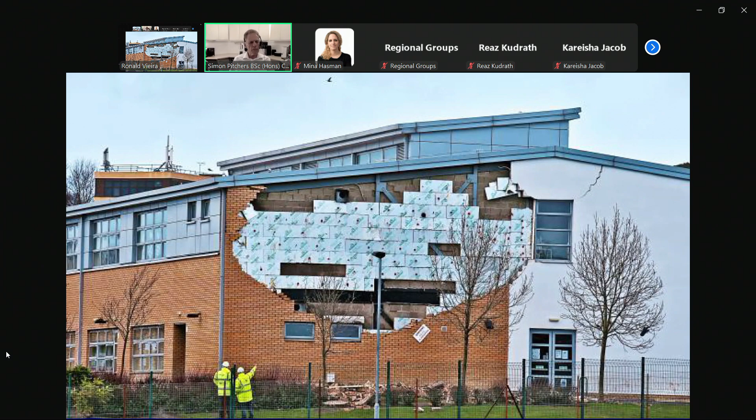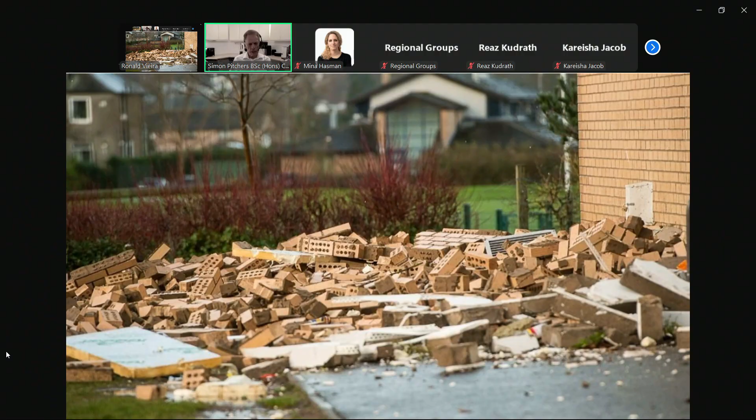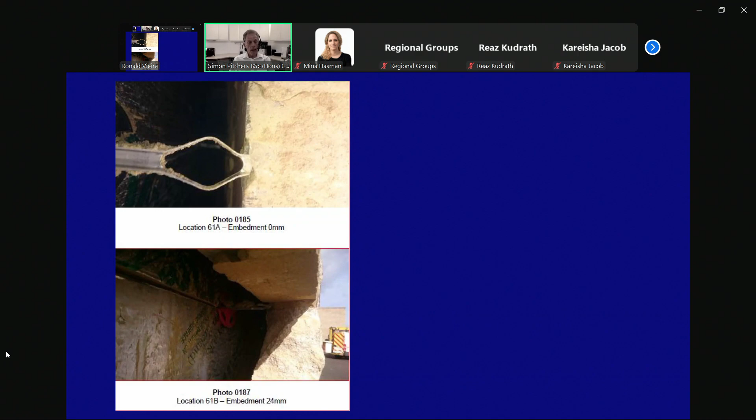You see the photo underneath, there's another wall tie which has got about 24 millimetres of embedment. Here's a view down the cavity, a very wide cavity, and you can see the problem was absolutely widespread - there were virtually no wall ties bonding the two leaves together. It went further than that, because at the top of the wall, the designer had quite properly designed a proper restraint system which would be bolted to the steelwork, extend down the cavity, and then you had a stainless steel cutlery set effectively, which would hold the two leaves to the vertical pieces extending down the cavity. They found those components resting on the top of the wall when they did their investigation. Now, what's really astonishing is, this is 2017, every tick sheet you can imagine had been ticked by every QA specialist that ever lived. It was absolutely ticked to pieces, and it didn't make the slightest jot of difference. That's one of the learning points from all this - you just can't rely on tick sheets.

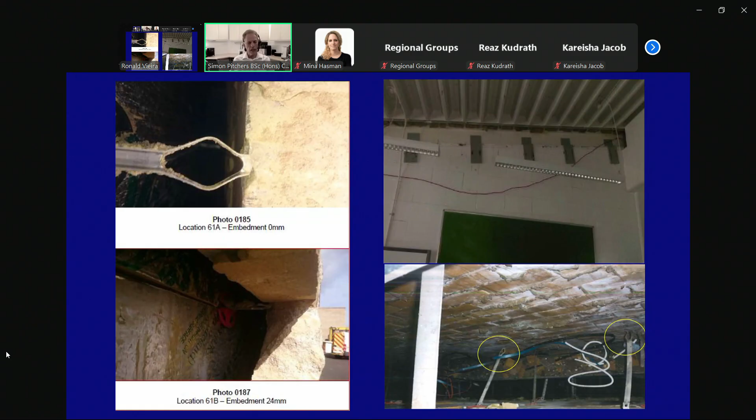Then we move on to the terrible Grenfell disaster. Now, the most recent report doesn't say the principal cause was bad construction, but there was poor construction involved as well. The main cause of the problem was the use of incorrect material on the outside skin, and also incorrect insulation, which was inflammable. But the regulator in the UK has got a lot to do - they've got to manage and update their system, check designs comply with the regulations, do auditing of their inspectors, and carry out stage inspections of construction. People think incorrectly that that's enough, but it isn't.

I've worked on site loads, and I'm sure lots of people here have as well. What you do when you know the building control person's coming round, you cover everything up and point them in a different direction so they don't see what's wrong. I'm afraid that's what it's like in the construction industry. So what you really need is comprehensive scrutiny of construction, and nobody does that, and it's getting worse. That's the big problem.

Now you look at this - this is CROSS. This is a report they produced on why things fail or go wrong during the construction phase.

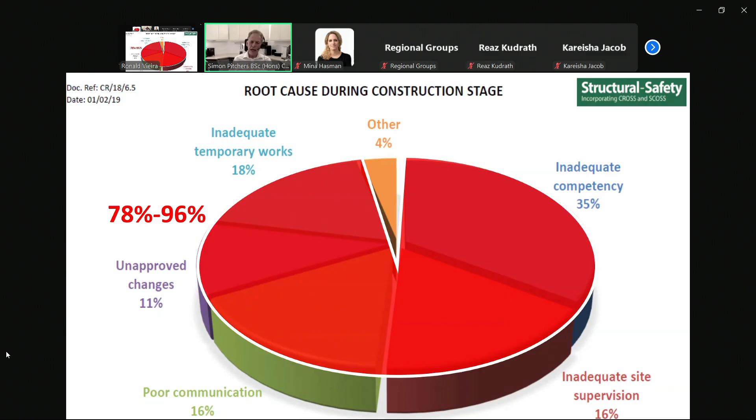If you look at that as a whole, it would appear that somewhere between about 80 and 96% of the time, if there had been scrutiny on site, those things wouldn't have gone wrong. So I think scrutiny is a really important thing that's completely overlooked, and it's something we all need to make an effort to get right.

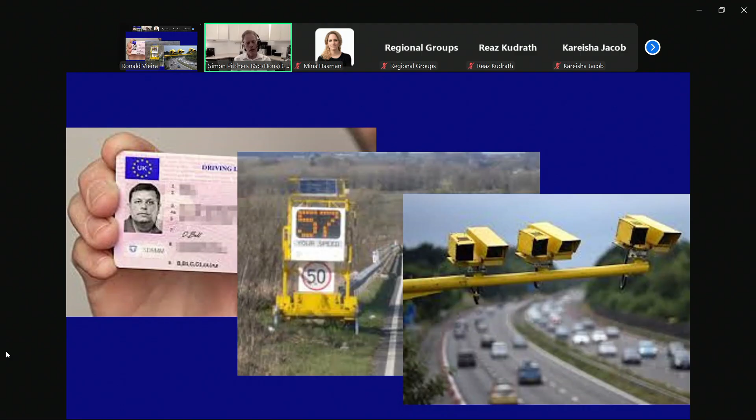People say it's competence, but I've got a license that proves I'm competent to drive. But I'll tell you what, when it comes to observing the rules, I'm much more likely to do so if I'm under scrutiny.

So the ideal scenario would be to have everything in every building scrutinised while it was built. But you then come up against this problem called proportionality. There's only so many people out there who are able to do the scrutiny, and there's not enough resource to scrutinise all buildings being constructed. So we've got to find a better way.

And that's where this guide comes in. Now get ready with your camera phones, because there's a QR code you can photograph in a minute, and you'll get this document for free. It's like the notes to this lecture, really.

It's called A Guide to Managing Safety-Critical Elements in Building Construction. Not a very catchy title, I appreciate that, but it does bring about some quite useful stuff that I think you'll benefit from, no matter which country you're operating in or how you actually operate.

So the ideal scenario - I'm going to leave this, but don't worry, we'll get it again at the end - is that we actually look at every single thing that's being built, but we can't do that. There's just too much to look at.

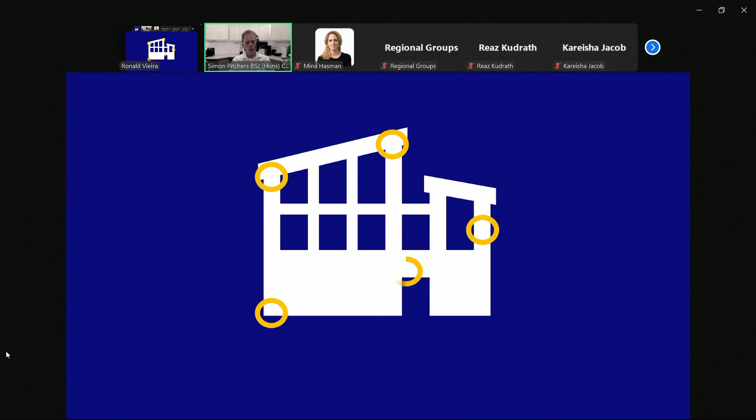So what the guide does is it shows you how you can identify safety critical elements, and then it explains how to deal with them, so we're only focusing on the elements of key importance, reducing the inspections and the amount of evidence needed.

Now you'll be pleased to know that you can read the whole of my document in 12 minutes. That's from the end of the contents page to the beginning of the appendices - a 12-minute read. So there's no reason why you can't download it and read it at tea break time or when you're going home tonight.

I reckon, and I know this is an outrageous claim to make, but I think this is a silver bullet. I think if it was implemented on all projects, we would just transform the industry. Carbon saving as well - that's something else I'll come to at the end, which would come out of this. I really do think this could solve so many problems.

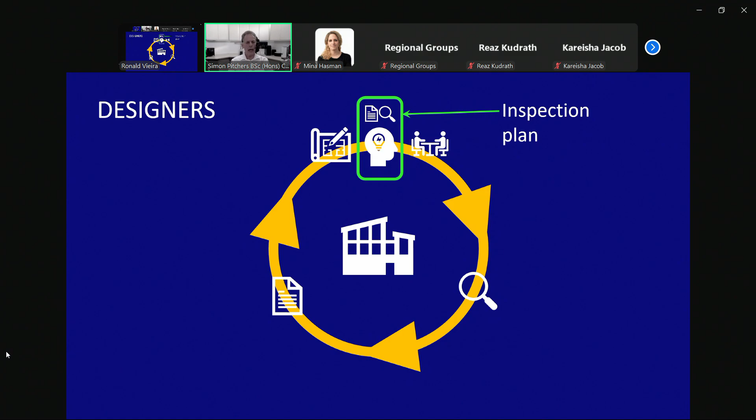And that is called an inspection plan. So you have an inspection plan before you start. You might already do this, I don't know, but we certainly don't do it properly in the UK yet, though we're gradually dragging ourselves in the right direction.

Now, what about quantity surveyors? Well, quantity surveyors need to broaden their horizons. They don't want to just be all about value engineering and cutting costs and cutting capital. It just drives me mad.

I was out the other day in Weston-super-Mare, wandering around a block of flats, and I remember thinking, I told them to hot dip galvanise those balustrades. And they didn't. The quantity surveyor said, no, too expensive, Simon. We want to save ourselves £1,000 and we're going to paint them.

And now they've got a sort of seven-storey building and it's going rusty because it's by the seaside. And it's going to cost a fortune.

Such false economy. So instead of driving costs down, quantity surveyors need to keep an eye on costs, but they need to look further than capital costs. They've got to start believing in the value of proper inspection and collection of evidence to prove compliance. They need to appreciate how this can save vast sums of money.

I mean, you look at the money that's being expended in London at the moment on things that have gone wrong. Whole buildings are being demolished and rebuilt as a result of this. Think of the carbon footprint of that. It's mad. All we've got to do is make sure we're doing it right the first time.

And what they need to do is make sure the inspections are being done, and they need to check up on the inspections and check people are collecting the right evidence as well. So it's maintaining this involvement and valuing checking.

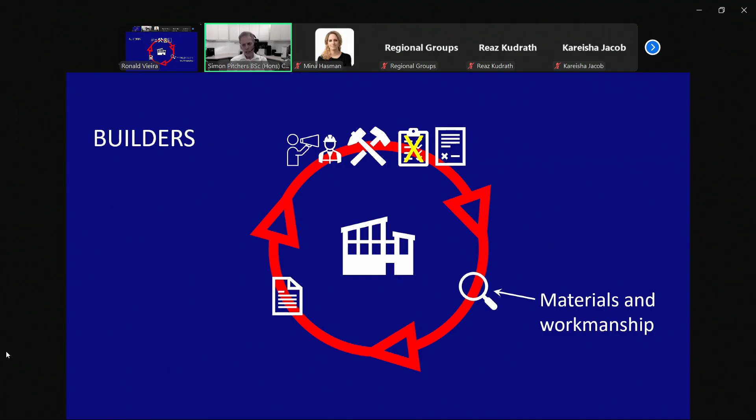So that's how we've all got to change. That's how all the disciplines have to change. What about the process? Well, the process really needs clarifying, needs simplifying, needs refining, and it needs streamlining. We've just got to get smarter with this.

So here are some examples. Really, you shouldn't be allowed to start work until the design is complete. Only then should you be allowed to start. I know this sounds basic, but honestly it happens all the time where you'll have builders starting work on site and they've not got proper information to build from. And then we complain that our work isn't built correctly, and that's the reason why.

It's not their fault - if you don't have proper information and you've got a program to meet, you just crack on, don't you? Another thing: changes. If the design is changed, you've got to stop and not do anything, because you need to consult the stakeholders in the design - building control, the client, other members of the professional team. When they say, yeah, we're happy, that's when the change can be implemented.

Now, change, as everybody probably knows, is the mother of disaster. So you've got to control change. Change inevitably happens - we've just got to keep a lid on it and make sure everybody's happy before it's implemented.

Having to go through this process will slow things down, but it'll make us a lot better at getting it right first time. Now, when people arrive on site, before they're deployed, you've got to check their credentials. The principal contractor needs to get evidence from each person operating on their site to show they're competent to do the tasks before they're let loose on site. They also need to make sure these people know what evidence will be required of them before they start working. So in a nutshell, everybody in the team needs to take a bit more responsibility. That's really what this whole guide is about. Now let's get into the nitty gritty, shall we?

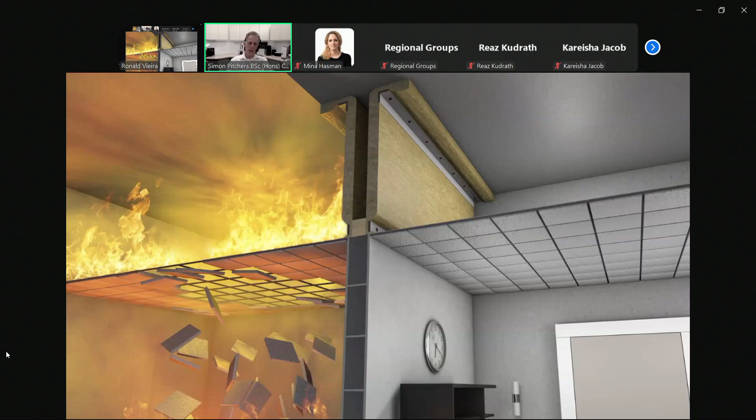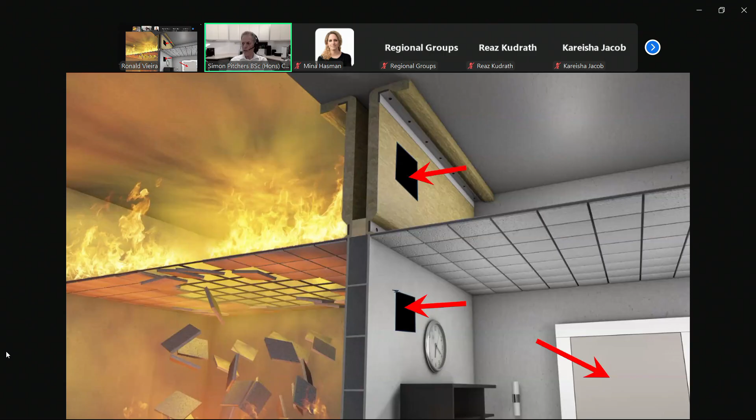The next category is anything that might impede escape in the event of fire - for example, that ceiling that just fell down would be a safety critical element. Here's more examples: a hole through that wall would be a safety critical element because it could allow fire to spread through a fire compartment, or through that fire door - that could be a real problem as well. So there's a lot of fire safety related items that could be an issue.

The next category of safety critical elements are things that stop people or objects falling off or out of buildings. So those fixings on that balcony would be safety critical. Those fixings holding that suspended ceiling in place would be safety critical. Those wall support units attached to the outer leaf would be safety critical as well, and those mount systems holding onto those PV panels. I had a PV panel blow off the roof of a supermarket and it went through the back window of a Range Rover with a child in the back seat. Luckily nobody was hurt, but it shows how dangerous these things can be - one loose screw and you're really in trouble.

Wall ties - sorry to keep harping on about wall ties, but they're just such an easy target - and the things that restrain stone as well. So those are things that stop things or people falling off buildings.

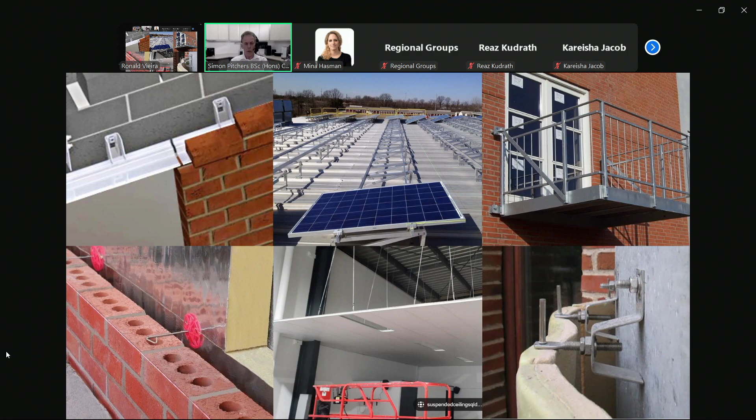Let's move on to the next category - this is collapse, things that prevent collapse. So things like precast units and their connections, steel beams and their connections, big retaining walls - making sure those are built correctly. They are safety critical elements. If they go, you could have a real disaster on your hands. Post-tension slabs, that's another one. Masonry reinforcement in walls - if you forget to put that in and the wind blows in the wrong direction, you could be in big trouble.

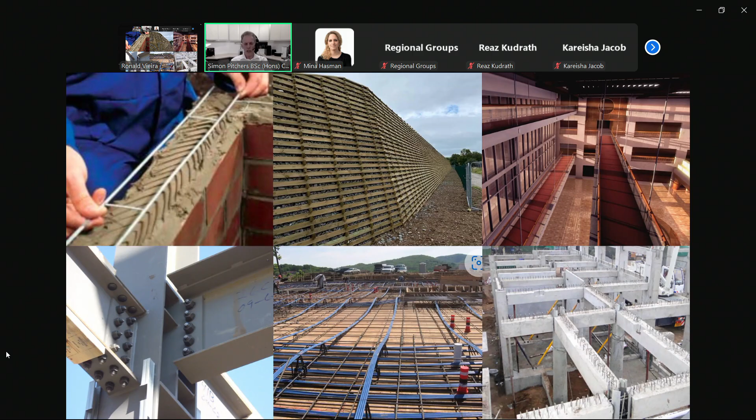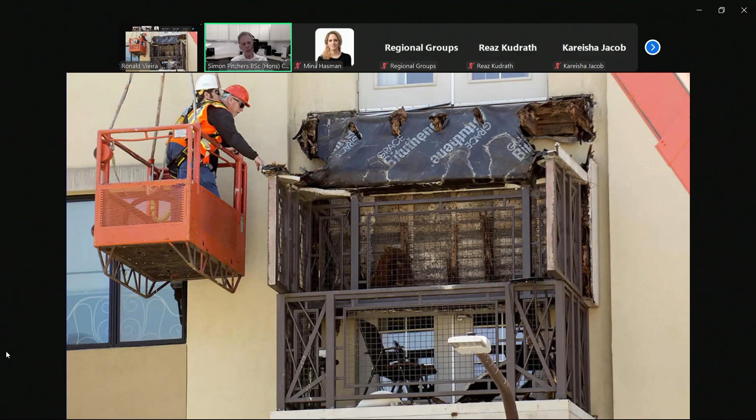And that sadly is the Berkeley, California 2015 balcony collapse. You can see the balcony above has fallen onto the balcony below, and you see those stumps sticking out of the wall - those were decayed timber joists, which were cantilevering from the face of the building. Those were obviously safety critical elements.

Another category is things that provide protection from, or could detrimentally interface with, hidden hazards. For example, if you've got a tunnel and you're driving piles near it, that pile would be a safety critical element because it could possibly go through the tunnel, so that would require extra special scrutiny. Another example is gas-proof membranes - somebody described a gas-proof membrane to me as flat roofing on the ground.

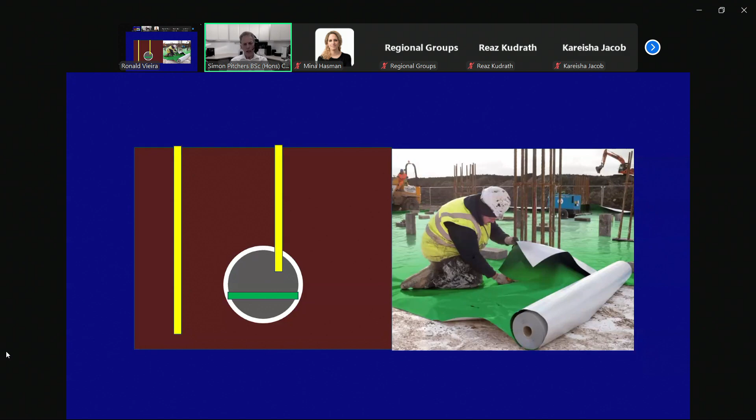And you've got to be so careful that there isn't a gap in it. Otherwise, the whole system could fail. So again, gas-proof membranes - those are safety critical elements.

So there you go. I think you've got a flavour now of how you would identify a safety critical element. And the guide that you will get - you get it for free by clicking on that QR code that I sent you - explains it in more detail. So let's move on now.

Let's look at scrutineers. So who can be scrutineers? Scrutineers who are going to look at that safety critical element. Now, don't forget, safety critical elements require independent inspection. But what do we mean by independent?

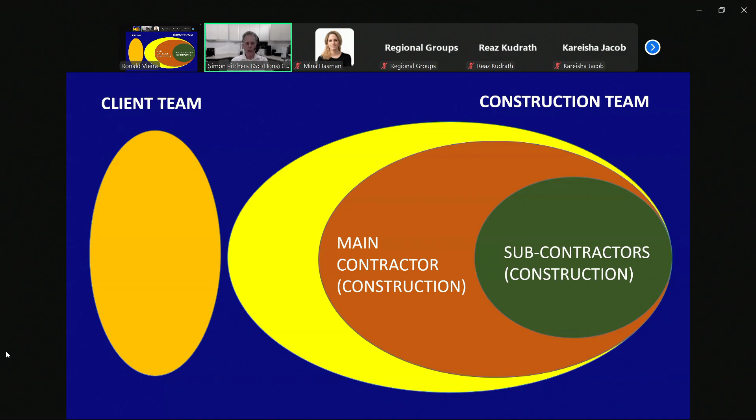How independent is independent? What you wouldn't want is for a scrutineer to be directly involved in the construction of the building. Otherwise it's like they're marking their own homework. So you wouldn't want a scrutineer to be from the main contractor or from the subcontractor's construction arm.

However, a scrutineer could be a third-party certifier. Now, quite often with gas-proof membranes, you have third-party certifiers who come to site, they review on behalf of the manufacturer that the thing's been installed, and then they give you a certificate at the end.

That's a good solution. Clerks of works - but I don't know what it's like where you're from, but in the UK, clerks of works are incredibly rare. The numbers of clerks of works have virtually quartered, I would say, in the last 10 years. It's very, very difficult to get clerks of works. So who is there left who can do this scrutiny?

Well, designers - that's where we need to step in. Designers could do this, and in fact, we are the best people. Designers are the best people to scrutinize their own designs. You understand the risks better than anybody. So who better than designers?

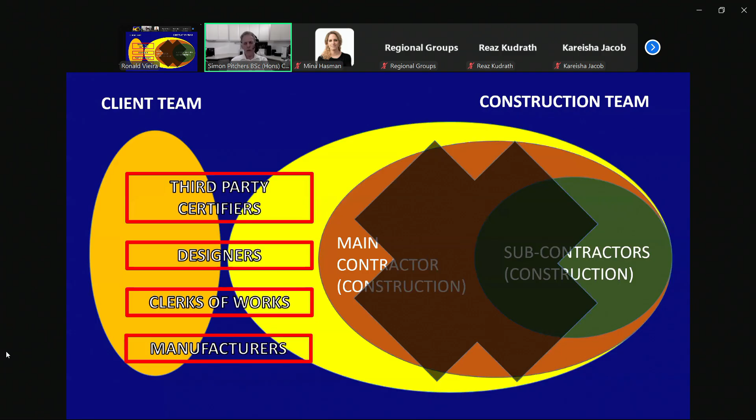But you'd need to get paid for it - you couldn't do it for nothing. And you wouldn't want massive liability in so doing as well. But we thought through that as well. And also manufacturers - manufacturers don't want their products installed wrong, so they are good people to come out and scrutinize. So that's where you can get your scrutineers from.

Okay, evidence - let's just talk about evidence. How do you specify the collection and retention of evidence? So first of all, how do you actually specify an element?

Now this is really, really critical if you're doing scrutiny. First of all, you've got to be absolutely clear about what scrutiny you're doing. You can't just give some kind of generalized comment saying, I'm going to visit the site so many times a month and look at the safety critical element. It just won't work, okay?

What you have to do is be hyper analytical on where the elements are. So you might issue a plan - let's go back to wall ties - and you might say, I'm going to look at the wall ties that are involved in the construction of that plan. But that's not good enough, okay?

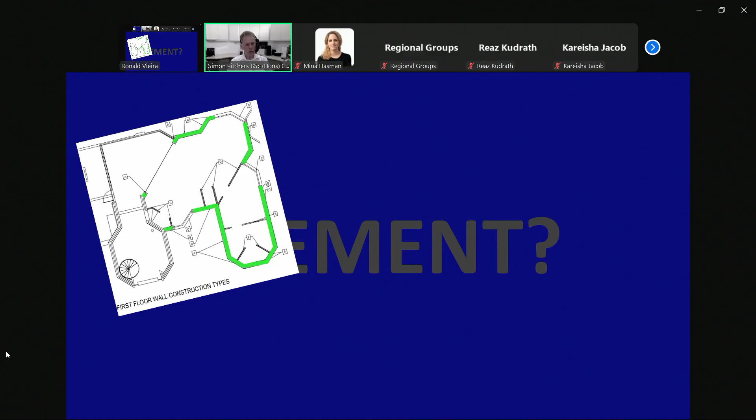What you need to do is mark up which bits of the plan had the wall ties that you thought were safety critical and needed scrutiny. But that's not enough, because you need to show them on elevation as well, because it might mean that you're doing all of the wall ties from ground floor up to roof, or maybe just from first floor. Who knows? So you need to shade that in on an elevation or find some other way of being very specific - you're saying where the location of the element is.

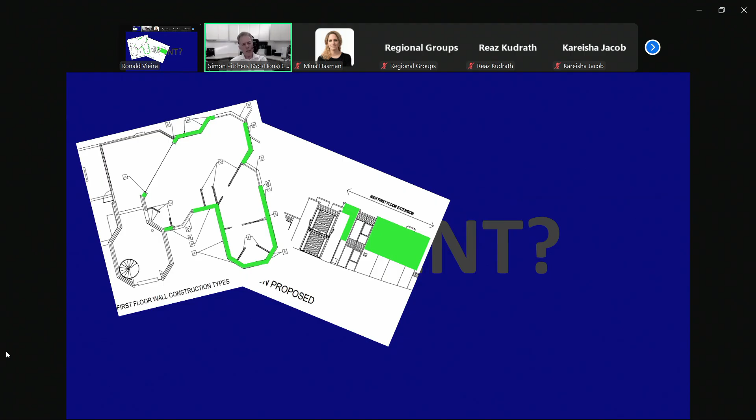You're being very specific in that regard, but you also need to say what you're checking against. So you need the specification, and you need to highlight which bits of the specification you're going to check.

Now, if you do those things, the scrutiny that you're going to provide to the project is absolutely nailed down. Nobody can say, well, you were on site and you should have seen that. No, I went on site and I was just looking at these things. That was my specific job, and that's what I've done, with reasonable skill and care. So I didn't look at anything else. That is all I have been contracted to look at.

That then gets away from the age-old problem of why designers are quite often, quite rightly, concerned about stepping on site, because they may get landed with all sorts of stuff.

And it's not just your inspections that you need to rely on when you're thinking about whether something's good enough or not. You may also depend upon other scrutineers providing you with their evidence, and you can take that into consideration. It might be the builders saying, here's a load of reports we've done showing these wall ties, with all the photographs. You might say, I feel a lot more comfortable, but I'll go out and have a look at a few myself. So it's other people's input as well that's going to help you with your scrutiny.

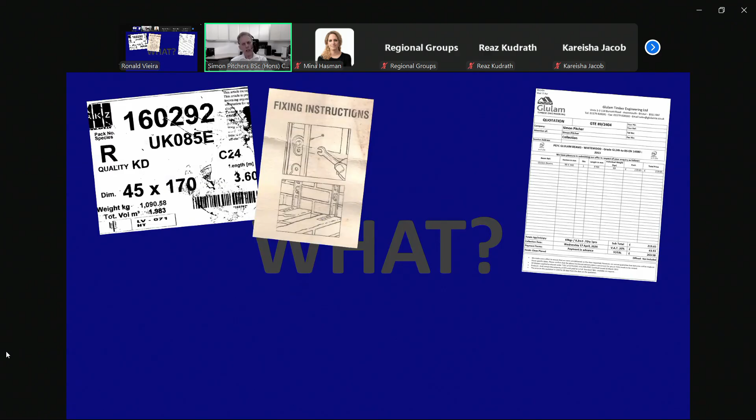Now, what sort of things will you be bringing back as evidence? Things like packaging labels — photocopy them, put them in the evidence pack. Invoices, manufacturers' fixing instructions, certification for elements you're looking at. Photographs, particularly vital if things are going to be covered in. You need properly organized photos so you can go back and see what things looked like before they were covered up.

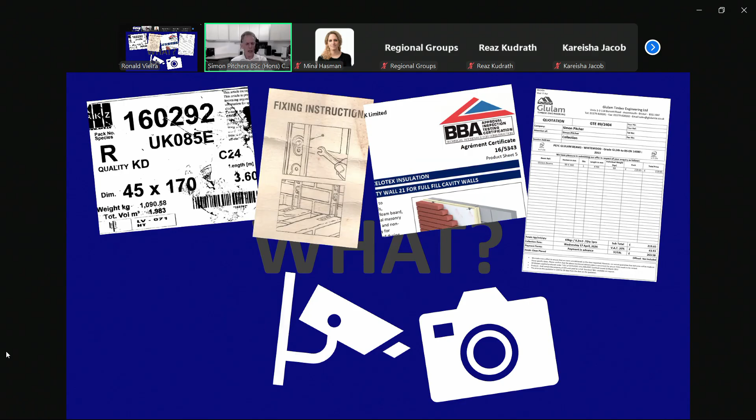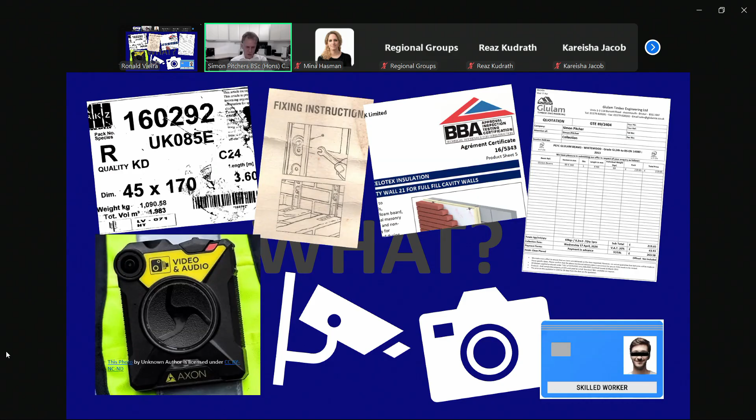Video footage — some builders really like CCTV camera footage, we found when using it on site in the UK, surprisingly. Body cams, you can get geolocated body cams where you can tell where the wearer was when the video was taken, which is quite good. And obviously things that give evidence of qualifications. Those are the sorts of things, and there's a comprehensive list in the guide.

But most important of all are reports. The sorts of reports I'd expect to see in evidence are things like an initial briefing, where if you're doing scrutiny on a certain element, you might go out to site, brief the team and say, be very careful about this particular thing and that particular thing, easy to go wrong. Initial briefings are really worth their weight in gold.

Material inspections, when things come to site, should be looked at and checked. Test results — you might have pile test results and the interpretations that go with them. You may use those alongside your own evidence as to whether the critical element is okay or not.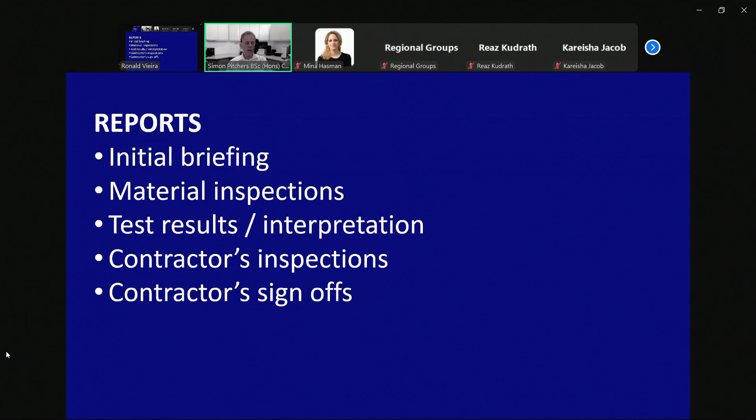Contractors' inspections — they should be providing you with those. Contractors' sign-offs where they say, we looked at all of this, we've looked at all the evidence, we believe this is right. It's their responsibility to get it right, not yours. You're just looking at a certain snapshot of that critical element, nothing more. And independent inspections, like the people putting in the gas-proof membranes, other designers, manufacturers, clerks of works inspections — all of those sorts of things are evidence.

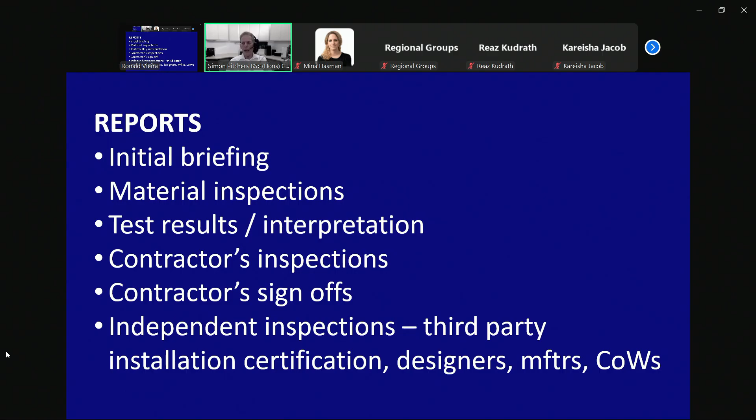Now, this is the bit: inspection reporting. A lot of people are scared of reporting on site visits because they see it as a way their liability can be extended beyond where it should be. But there's no need to be scared. It's that wobbly hand moment where you have to put pen to paper, but you're not actually signing to say that the critical element has been installed correctly.

What you're signing to say is, this is the critical element, this is what I've just gone and done, I've gone out and looked at it on these dates, and this is what I saw. As long as you do that, you may draw a conclusion. The conclusion won't be that everything's been constructed completely properly. Your conclusion may be that from the evidence I saw, I've seen nothing to suggest it hasn't been built correctly.

That may be your conclusion, and that would be perfectly reasonable on the basis of what you've done. But you can really contain your liability if you do inspections like that and report like that. Reasonable skill and care, that's the measure. The contractor remains responsible for compliance with the design, not you.

If you're checking a load of elements that are very similar, like wall ties, how do you do that? You can't look at every single one. What you do is decide on a sampling percentage, maybe 10%. You go out and start by looking at that percentage. Now, as you work, you may find they've all been installed brilliantly, in which case you may reduce the percentage of your inspections, to only 5% or 3% or 2%. On the other hand, you may find the 10% you looked at were all installed appallingly badly, in which case you'd want to increase the frequency of your inspections, and you probably want more money for doing them as well. So those are the two scenarios.

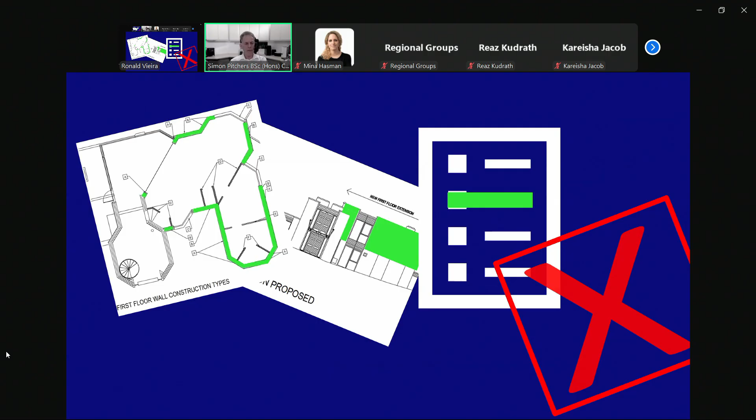Well, you're probably thinking this is going to cost a fortune. It's unworkable, Simon, you are in a dream world, it's never going to happen. But I would say this to you.

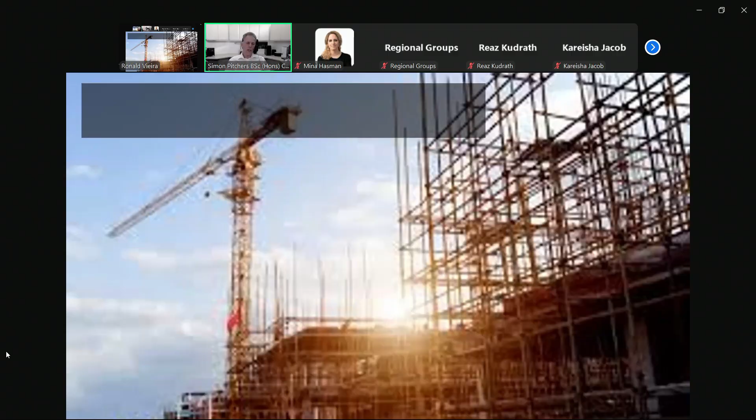What's going to be the wider consequences of this? Well, the skills of the workforce will start to rapidly improve. You don't want to knock down a wall too many times and put new wall ties in for free, do you? You want to do it right the first time. People soon learn if they're under that kind of scrutiny. And so the quality and safety of our buildings will improve, and improve quite quickly.

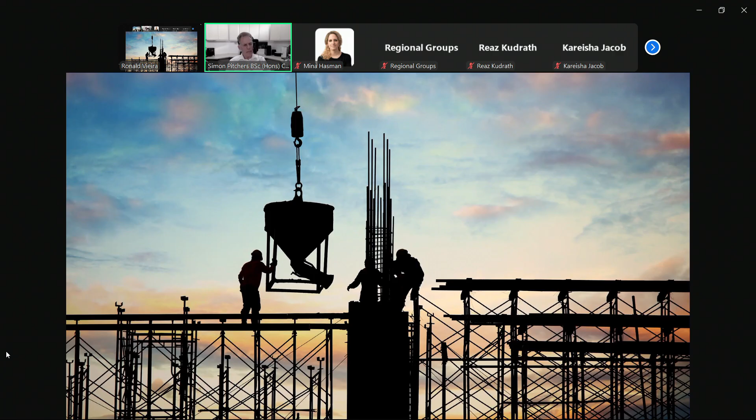The other thing that's going to happen is, at the moment, there's a disconnect between site and design. If you're a young designer and want to go out on site in the UK, quite often you're not allowed to—there's not the provision for that. As a consequence, builders often complain that you get unfeasible, impossible designs that they just can't build, resulting in undesirable remedial work and unnecessary carbon usage. So design quality and buildability will improve, and design safety will improve as well.

So the other thing that will happen is, Simon—sorry, if I may just interrupt you, we're running quite far behind schedule, so if it's possible for you to wrap up in about 2 minutes, so we have time only for a few questions left, Shalini. Yeah, thanks for mentioning that.

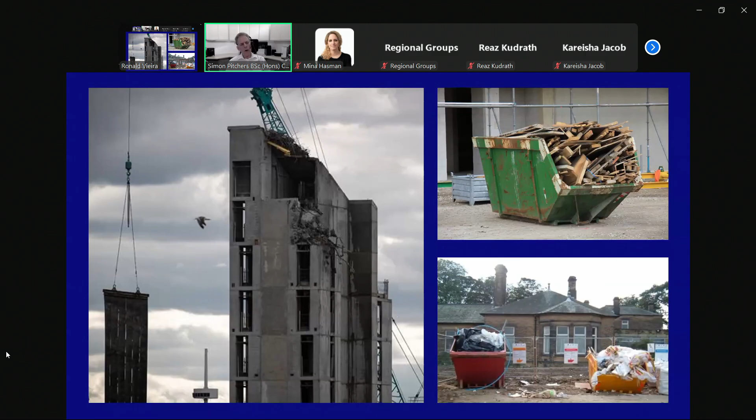We've got a huge amount of waste in our construction industry, and as the waste reduces because people are doing it right, efficiency will improve and your carbon footprint will reduce as well. And also, changes will become properly recorded.

I don't know if you've ever found as-built drawings—I don't call them as-built drawings, they're absolutely nothing like what was actually built. That's all the as-built drawings I've ever seen; they've never, ever reflected reality. Well, our as-built drawings will actually be as-built. It's not that individuals are problematic, it's the system. And what we need is a bit of courage now. We need to get together, work collaboratively, get the wheels grinding away, and see if we can get this thing to fly.

So, what do you need to do next? Get the guide, and then if you've got a project on which it's adopted, please let Patrick Hayes at IStructE HQ or me know. We'd love feedback for the next edition.